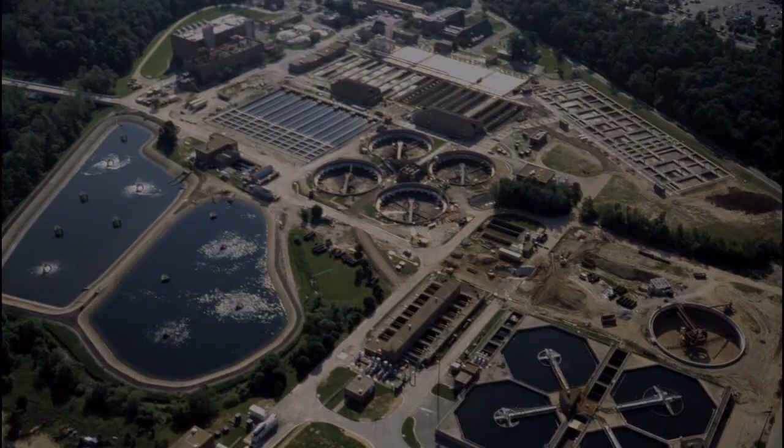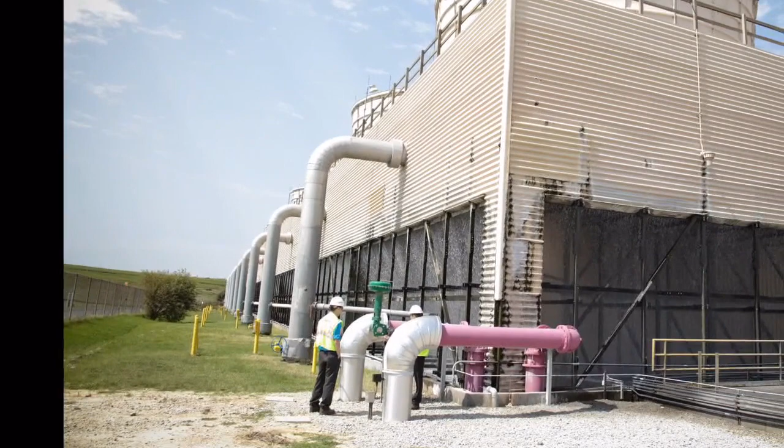as well. So we had about 5 miles of large diameter transmission line to design through this design-build project, and to really start to navigate through very urban or ultra-urban corridors with a lot of utilities and difficult terrain and a lot of major crossings. How did the application of a BIM, or Building Information Modeling for Infrastructure process, help your team tackle these challenges?

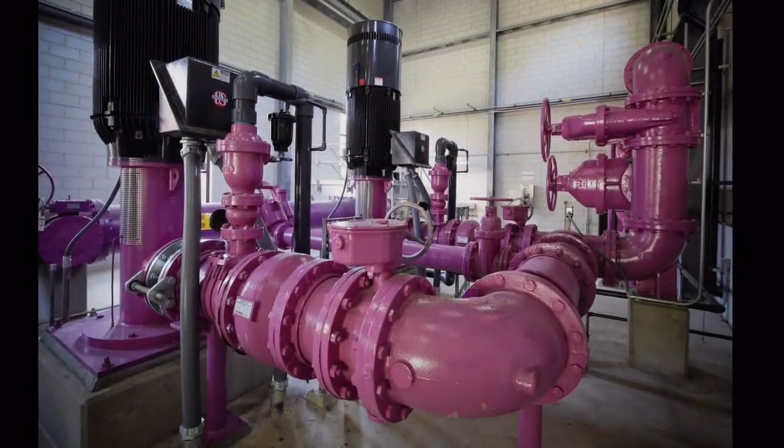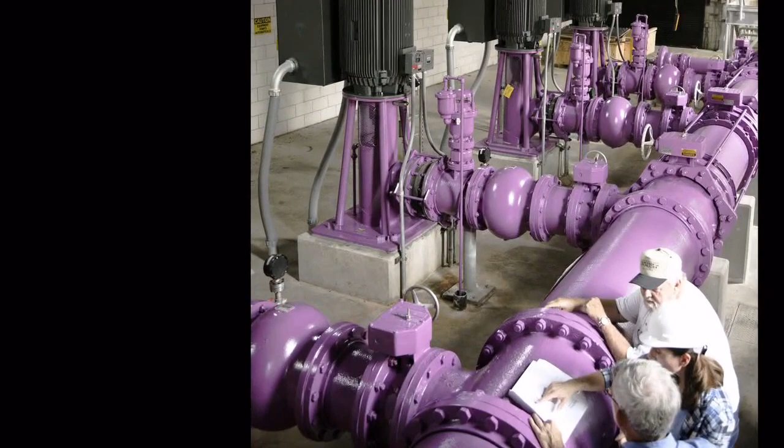There are a few big advantages to having a BIM for infrastructure design process, one of which was being able to produce a lot more information at a much earlier stage, which really helped us put a lot of the design concepts in front of the team, in front of the client, the contractor who's involved throughout the design-build project, as well as being able to dynamically update and evaluate different design scenarios, which came to be very, very important

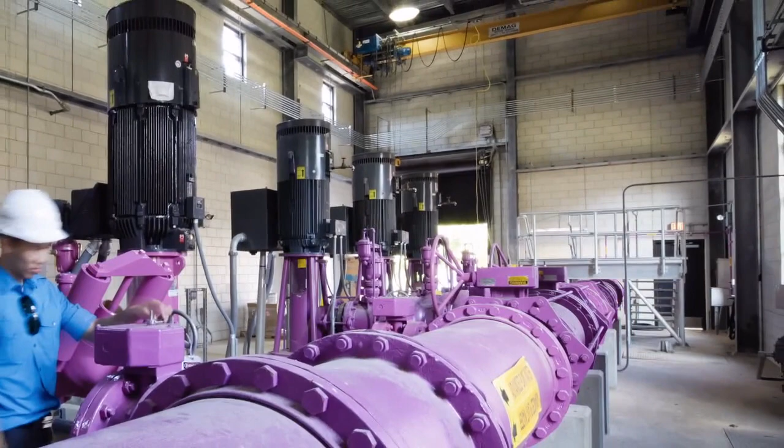in a project that was being constructed almost at the same time it was being designed, and being able to keep pace with the contractor and make these updates and evaluate these options really helped us make sure that we were always up to speed and providing the best design possible throughout the entire design project.

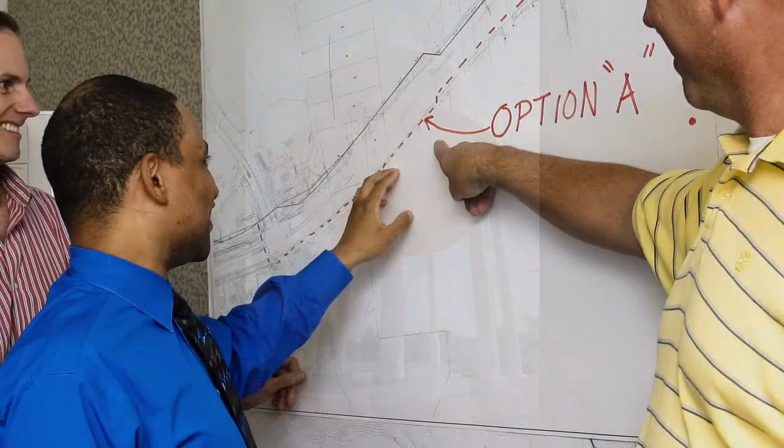So Cody, while we're on the topic of BIM for infrastructure, describe how a BIM process helped you in terms of your firm's role relative to the other players in this project. We were the design engineer who focused on the transmission line design as well as the plant pump station design, so a lot of the actual hydraulics and water design.

We coordinated with the contractor, who was a different entity, and then we were involved with a lot of other agencies as well as other projects going on at the same time, so we had to be able to coordinate and adapt to other design firms using their tools and bring that information in, and they were modifying their designs at the same time our project was going on, and so we had to make sure the whole environment was just this one living piece that always had to stay up to date and concise.

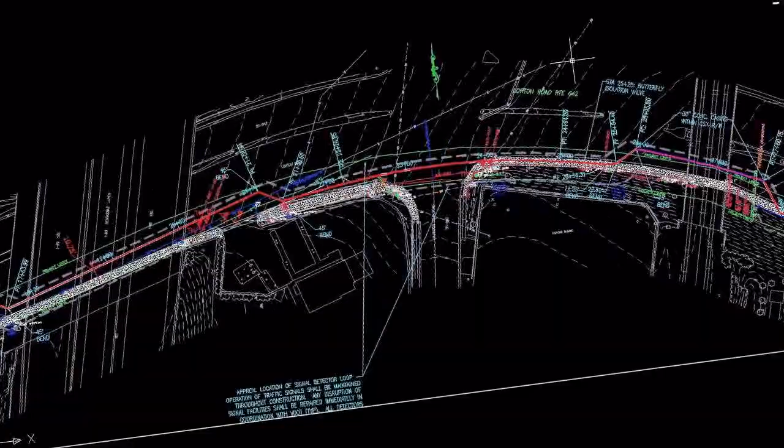I understand you use software from the Autodesk Infrastructure Design Suite, including Autodesk Map 3D, Autodesk 3ds Max Design, and Autodesk Infrastructure Modeler to help on this project. How did each one of those elements help? We used Autodesk Map 3D in the beginning of the project to quickly bring in a lot of information from different sources, including GIS content that we had from the county, that really helped us develop a large-scale, big picture of the entire site that we were focusing on.

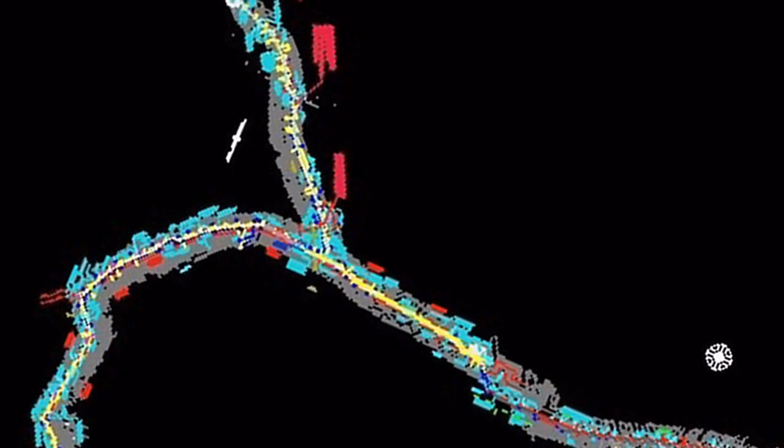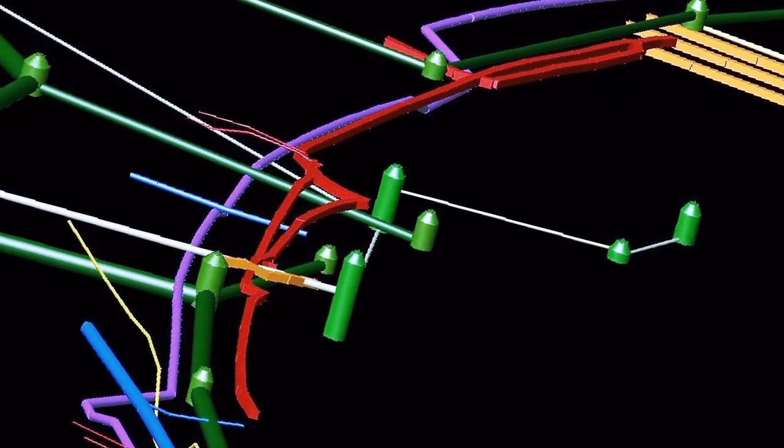We used tools like Autodesk 3ds Max Design that allowed us to take a lot of our Civil 3D design content and put it in a more visually rich environment that could be presented as an animation or a series of visuals that helped display the information to the client or to the public in a way that was a little bit more clear than a plan and profile traditionally is developed and delivered.

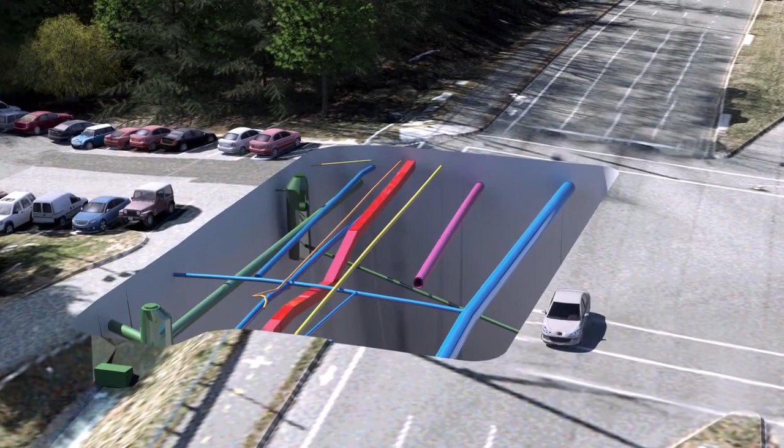Autodesk Infrastructure Modeler is something we've really begun to dive into as we revisit this idea of how much information can we pull together in this conceptual design phase and really begin to evaluate all the alternatives with as much comprehensive detail as possible, meaning that we're pulling in aerial topography and aerial photography to create a very large-scale terrain model with a lot of detail in it, and then quickly generate information from GIS data and portraying it based on those attributes and showing design information all within that same picture in a very fluid environment that handles a lot of this information very, very well.

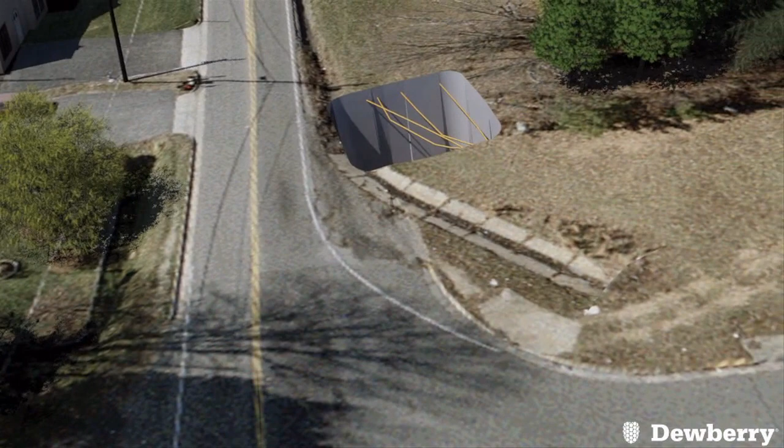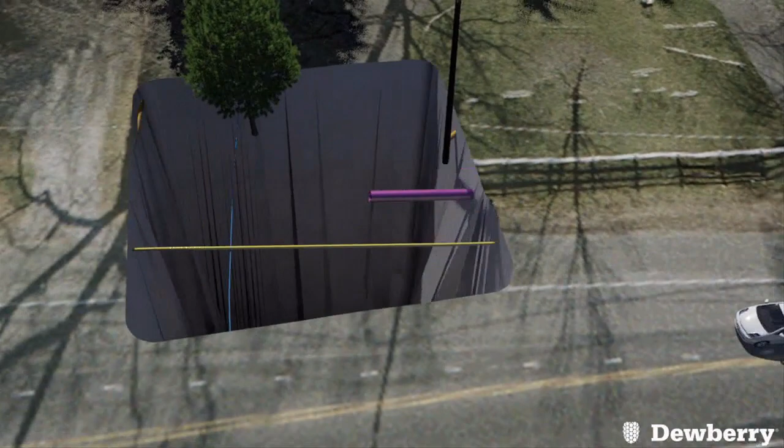Cody, going back to Autodesk Infrastructure Modeler, we're now seeing a lot of interest in this technology from the infrastructure community. Where do you see it playing out as a tool for you going forward into future projects? The biggest benefit to Infrastructure Modeler is that to us it almost seems like this next level of software development, and we're really able to pull in a lot more information into one central location than we ever thought was

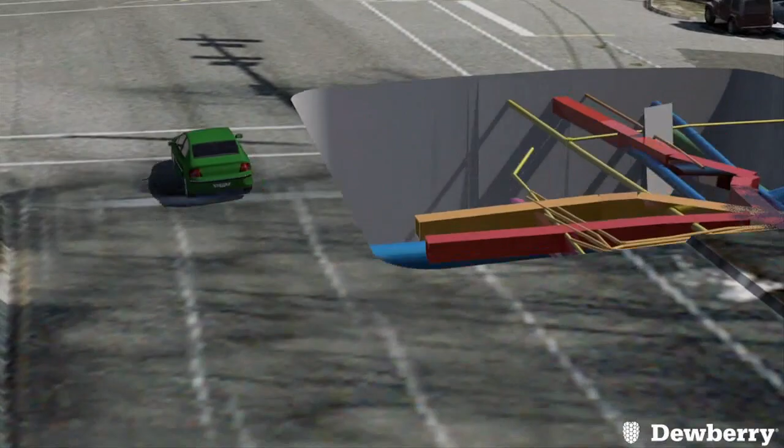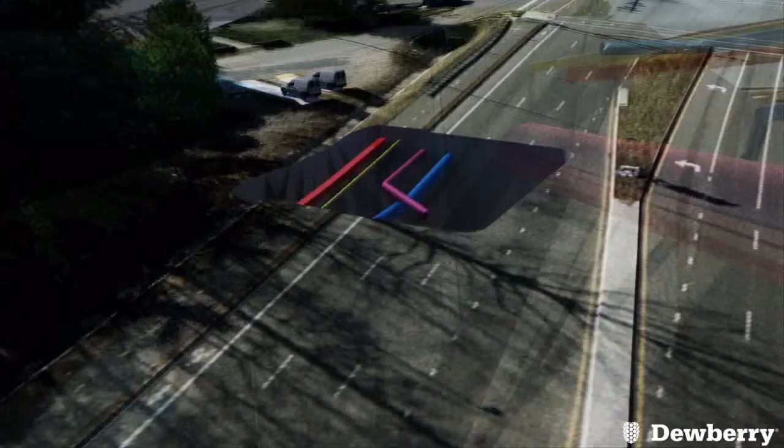possible. And the benefit there is that you're not just looking at an aerial map and then a profile and a plan view and having all these separate pieces, but everything is one concise model that is able to portray the entire information, the entire story of the plan, the development, and everything through very, very large stretches of a design environment. And in our case, it's miles of pipeline design.

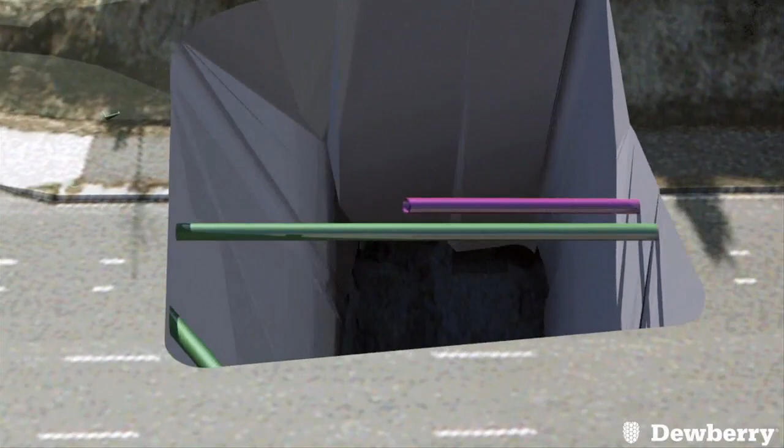And it really is helping us to collect a lot of information very quickly and put it in a setting that is appealing to and understandable to the general public and clients and people who are more interested in a big picture than plan and profile sheets at very early stages of the design process.